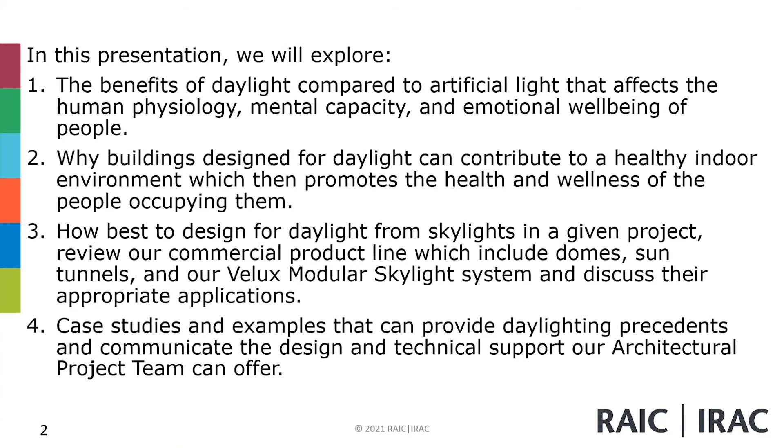And at the end of the session, participants will be able to identify the unique qualities and benefits of daylight versus artificial light as it relates to human health, development, and comfort, analyze the use of daylighting design strategies and principles using skylights, apply product knowledge to choose the appropriate skylight for their project, and recognize buildings using daylighting from above that emphasize the well-being of people that use the space.

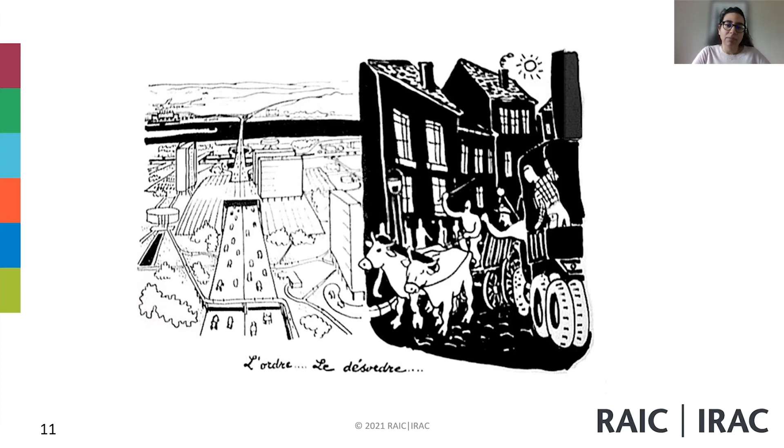It is certain that our bodies and minds need the sun. Humankind has always had an innate connection to the sun and has relied on its resources for health and flourishing. And the sun is the central entity for sustenance on a biological and emotional level. Light from the sun is fundamentally unique and has the highest light and spectral variations needed to support biological functions.

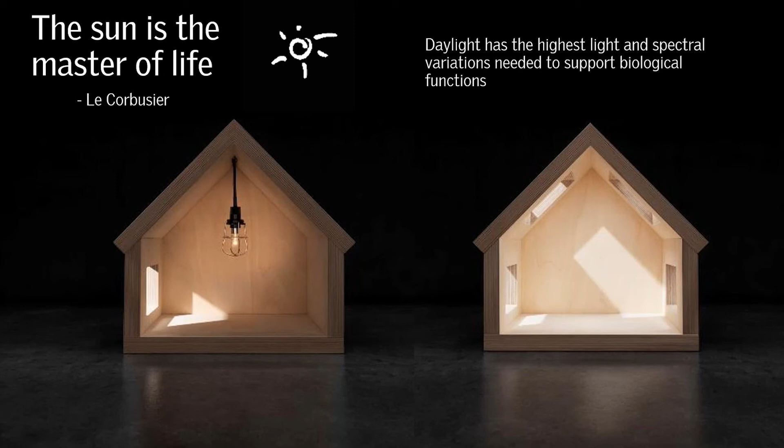Without the sun, we simply could not be sustained. And without daylight, we cannot flourish. In fact, a lack of daylight can have extremely negative effects on us. We can experience less energy, mental capacity, seasonal depression, and even increased risk of infection and disease. We need exposure to daylight for visual comfort and health. And our eyes do more than just see light. Our bodies respond to the different aspects of the light spectrum, not just visible light.

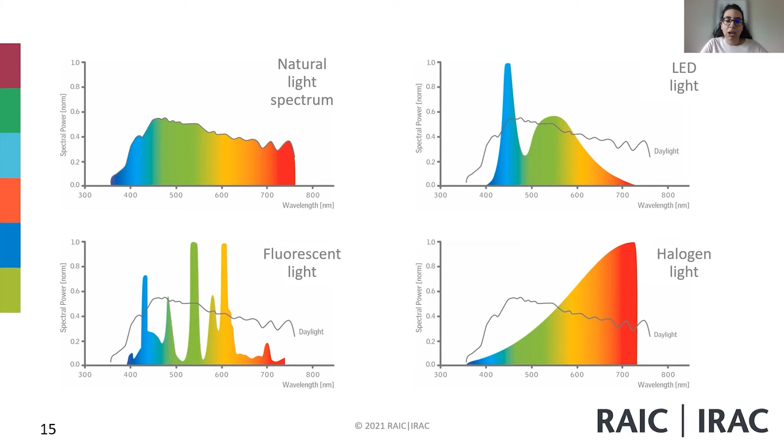As I said before, we need the sun for more than just seeing. The sun's radiation affects our bodies, minds, emotional health, and behavior. The sun's nutrients influence countless factors of human physiology and behavior, which are governed by the circadian rhythm, which is our 24-hour biological clock.

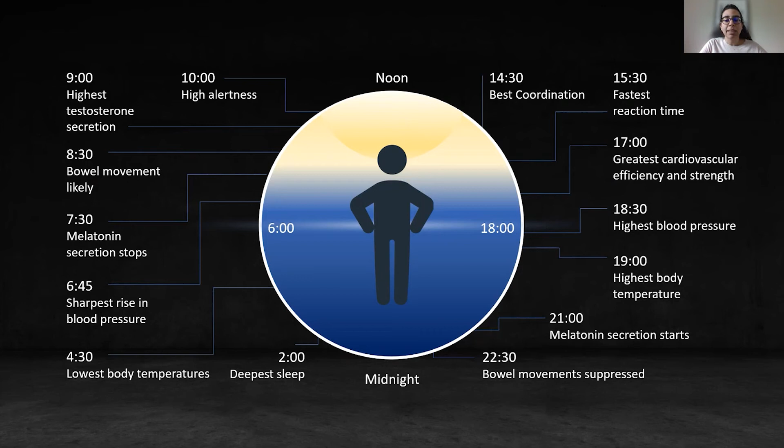So we are genetically bound to the natural rhythms of daylight to guide the body in cellular growth and the secretion of hormones. These variations stimulate the body's biological master clock on a cellular level, which includes the promotion of the processing of proteins. There's also non-visual input of daylight that is needed to synthesize vitamin D into calcium. It also regulates melatonin, which is related to sleep, and cortisol, which is related to stress. And ultimately, daylight ensures that our bodies are well maintained and balanced from day to day.

Circadian rhythms are kept in sync by various cues, including daylight levels throughout the day, which the body responds to in a way facilitated by a group of photosensitive cells found in the retina. And these are the eye's non-image forming photoreceptors. Lights of high frequency and intensity promote alertness, while the lack of this stimulus signals the body to reduce energy and prepare for rest.

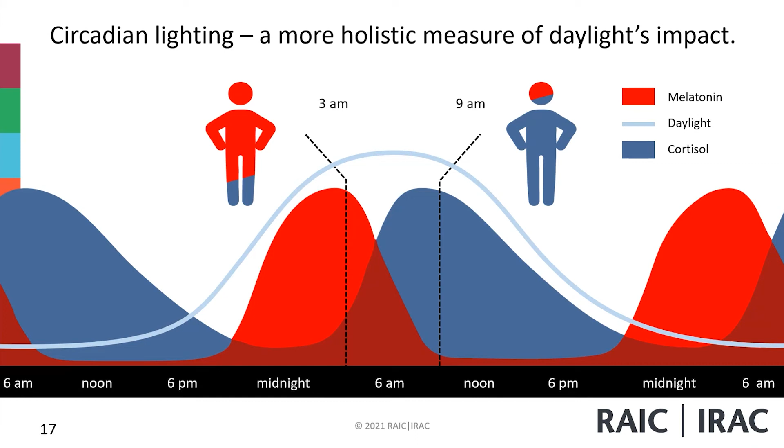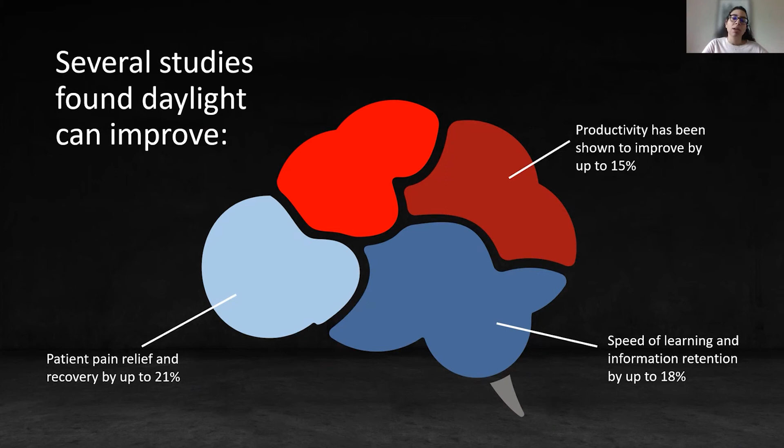We also see that several studies have found daylight to improve many elements of people's experience in the world. This includes how quickly children learn and retain information, shown up to 18%. 46% more daylight can help patients with pain relief and recovery by up to 21%. And even productivity has been shown to improve by up to 15% with greater exposure to daylight.

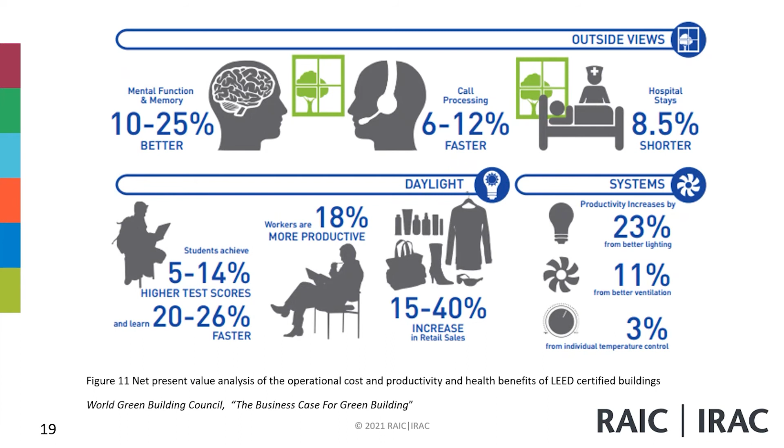There's also this element of view and surroundings. Sometimes it really is about what our eyes are seeing too. Looking outside changes the inside. When you open the interior to the sky and the surrounding landscape, the perception of the room is altered entirely. Suddenly it becomes a doorway to the outside, a place with plenty of daylight, space, and a connection to nature.

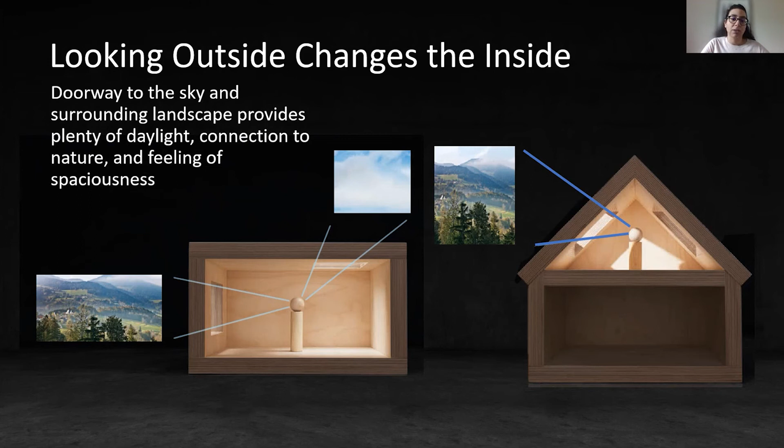And this draws back to the idea of biophilic design and how that can come into play in our emotional well-being and comfort, as well as thermal and visual comfort, which are also important elements to consider. You can have exterior views that absolutely transform the essence and expression of the interior of your space. This doorway to the sky provides views to outside, both the surrounding landscape and the sky. And both are really important for psychological and visual comfort.

It's also able to make the space feel bigger and brighter. You can experience less eye fatigue when the light is more balanced and coming from multiple sources. And overall, we naturally enjoy these kinds of spaces more. So how do you design for this?

Well, daylight is most powerful from above. Roof windows and skylights have shown to provide up to 2 to 3 times more daylight than facade windows. And a good rule of thumb we like to use is the more sky you see, the more daylight you get. And we have to remember that the sun is an extremely dynamic light source, and there's diversity of daylight. So you have multiple light sources.

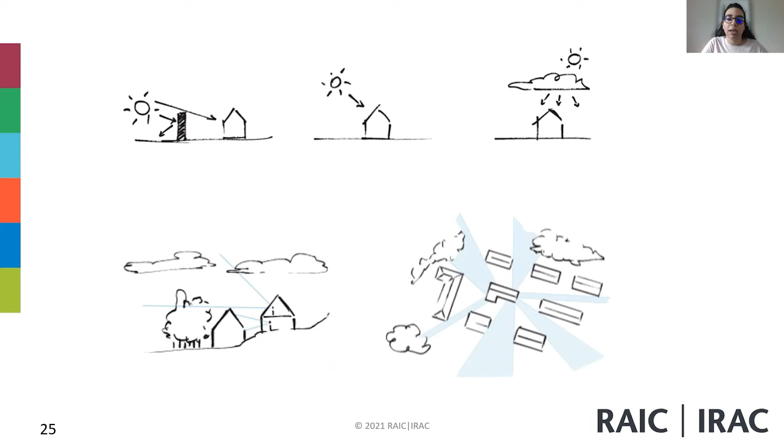And there are many factors that can affect daylighting in a building. You have your sky conditions, location, surroundings of the site. There's obstruction, orientation, the building's shape and size, interior materials, and reflectivity. There's a long list of factors. And the question is, how are you going to design your spaces to overcome these challenges in light of understanding the importance of daylight for people? And considering the placement of skylights can bring much daylight in spite of these challenges.

It's also important to understand the relationship of certain activities and how much light is recommended. This is really useful when designing for occupant comfort. So having the right amount of light is really important to reduce eye strain, and having comfortable light that is sufficient for the task and also easy on the eyes.

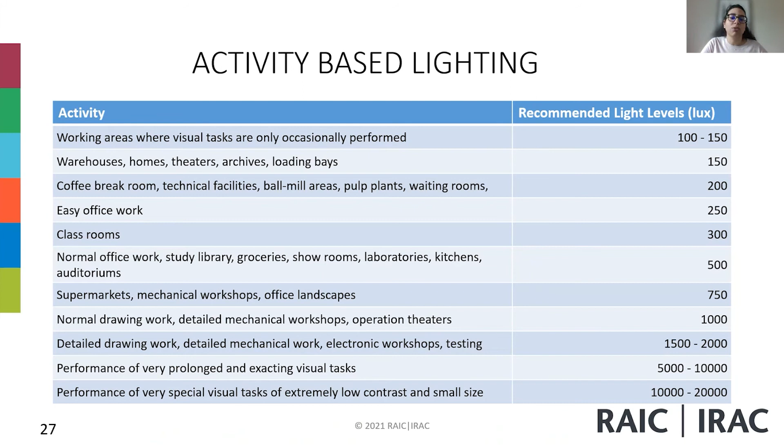And some examples from this table can include easy office work, which needs about 250 lux, classrooms, which need about 300, normal office work and libraries needing about 500, and more detail-oriented work is going to need even more light. So this is a really useful chart to have for targets for daylighting.

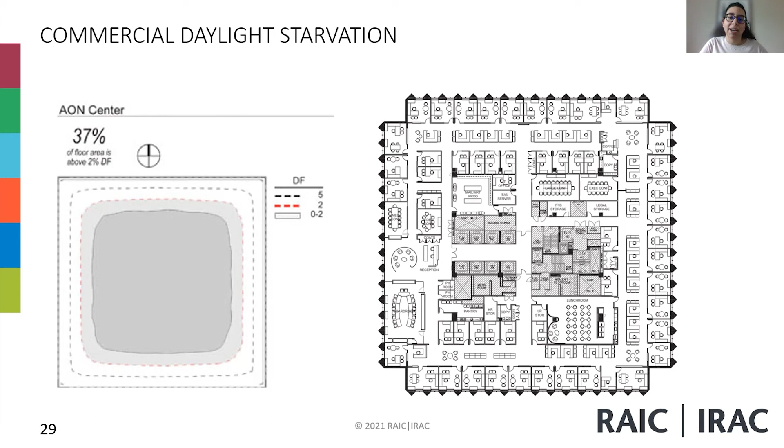In many locations on this floor plan, people will have to turn on their artificial light to do the tasks that they need to do. And drawing on personal experience, and I'm sure with many other people that have worked in an office, it is very difficult sometimes to have access or adequate access to daylight.

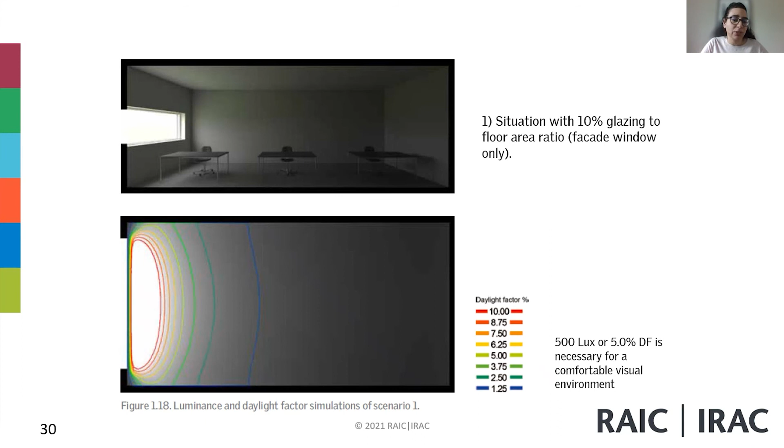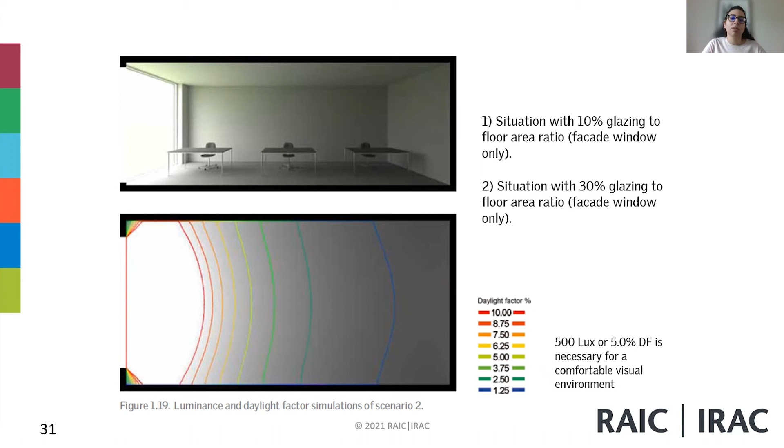A common solution that a lot of architects like to go towards is floor to ceiling glazing. And that will bring a lot more light, but the desk closest to the facade will experience a lot of uncomfortable glare, while the other desks in the room are still not receiving adequate daylighting. More than half of the room would still need to turn on their artificial lights to read and write.

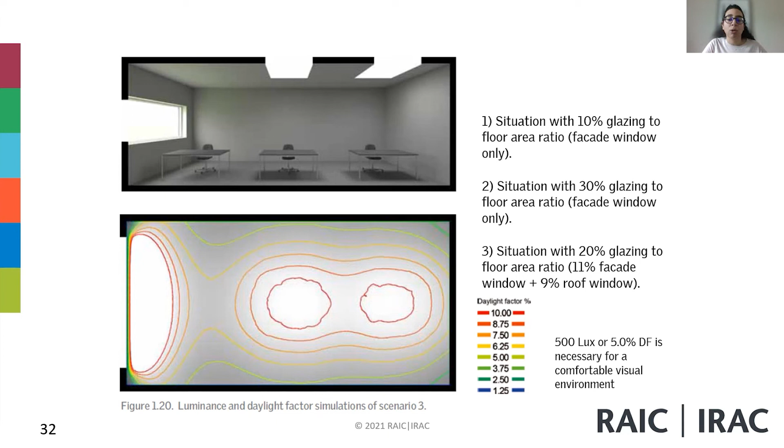Then we go to the third scenario, and this is showing the reduced facade window back to its original treatment, and then adding 2 skylights, which brings us up to 20% glazing to floor area ratio. The daylight here is well balanced with little glare and is distributed a lot more evenly throughout the entirety of the space, while reducing your overall glazing area. So the point is that with skylights, you can get more light and more comfortable light when daylighting from above.

Also consider using circulation spaces and stairwells. It is a great way to bring light down multiple levels of your building. It's also really effective in bringing daylight to those deeper and more central areas of the building that are farther away from vertical windows and may be starved for daylight. So think of designing these circulation spaces to be more open, which can also create opportunities to share and borrow daylight with other interior spaces.

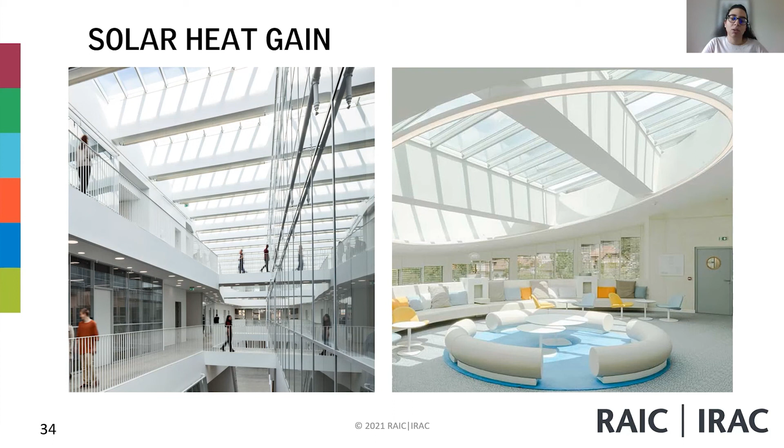And as much as we want more daylight in our buildings, we often don't want the added heat that comes from them. And we call this solar heat gain. Solar heat gain is the fraction of incident solar radiation that passes through the window. And solar heat gain is a major concern for all high performance buildings, even those with modest glazing. So this is a really important consideration when selecting a skylight.

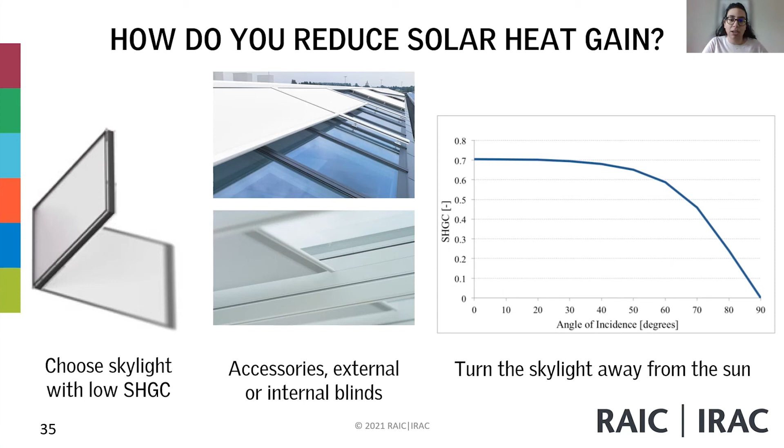You can reduce solar heat gain, and this is a similar approach to how you would consider glare control. Choosing a skylight with a lower solar heat gain coefficient can be really useful. Also using internal or external blinds. And since solar heat gain is a factor of area, you can also reduce the size of your skylight area. Another consideration is turning the skylight away from the sun and thinking of how sun path diagrams and orientation can play in this.

It's important to note that the sky also becomes a secondary source of daylight, as it is reflected daylight from the particles in the sky and clouds. And you can still receive a lot of daylight from the north. And north-facing skylights can provide a nice, even, diffused light with reduced glare and reduced solar heat gain due to its limited direct sunlight.

The location of your skylights matters also and can make a difference in the experience of daylight in a space. Having your skylights against a wall allows the wall surface to reflect light inward. We see light when it hits the surface, and that's important to note because the wall will become immediately illuminated, and this can increase the perceived brightness in a space.

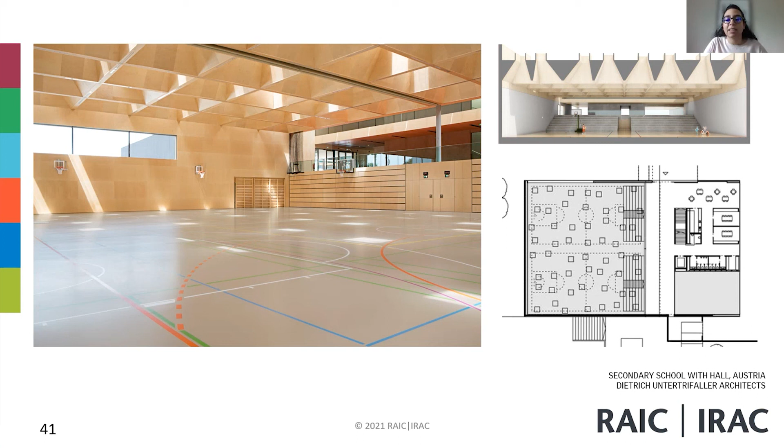You're also able to reduce your overall skylight area because of this. And the point is that you can bring more light in space by considering the design of your light shaft, especially flaring the surfaces of the light shaft.

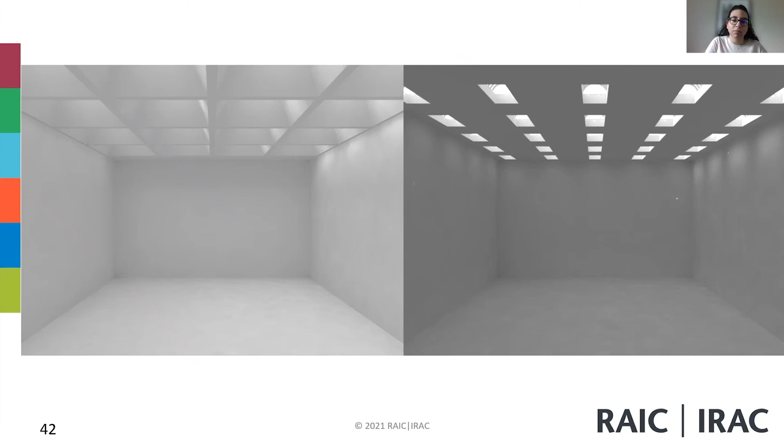Playing around with the repetition of elements and surfaces on your ceiling in relation to the skylight opening is also another way to bring in a lot of daylight in your space. By having this repetition of surfaces, you're able to have more light reflecting inwards off of more surfaces and more surface area. And using white to increase the reflection and the feeling of spaciousness, it's also going to provide more reflected and diffused and even light and less direct light.

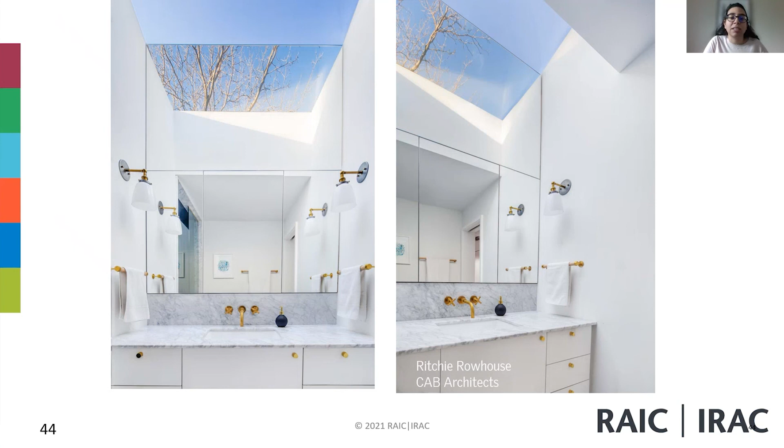And this also draws back on the idea that the more sky you see, the more daylight you get. So as you're reflecting more of the sky itself into the interior of the building, you're going to have more daylight in the space. So all in all, there are many creative ways to go about designing buildings with plenty of daylight. The emphasis is that daylight is an essential part of that.

And at Velux, we believe that both daylight and fresh air are key elements to designing healthy buildings. One consideration is the active house principle. The active house looks at three thresholds: comfort, energy, and environment. Some of the programs and standards you may be familiar with are built around energy, which can often miss the elements of comfort. An active house is built around comfort as the primary design driver.

Active house was born out of a need to prove that you can have a proper amount of natural light and fresh air and still build an energy efficient home. And ultimately, active house recognizes that human well-being is connected with a healthy indoor climate and key elements of daylight and fresh air.

So how can you select the best skylight? It's important to understand that designing with daylight is a thoughtful balance of considering the quantity and the quality of daylight. And it's equally important to know what kind of light will be provided by different product selection.

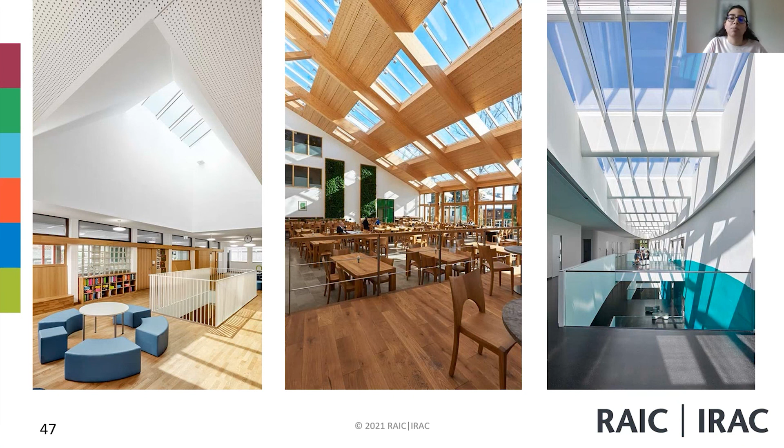There's such diversity in the types of projects that are designed, from residential to commercial, institutional, industrial, community buildings, the list goes on. And different buildings will have different roof types and ceilings. There is also diversity in the types of spaces and activities that are taking place in these spaces. And with that comes diversity in the needs of daylight in terms of quantity and quality. And with that comes diversity in product selection. So it's important to know what skylight is best suited for the daylighting needs of your project.

Sometimes an important element to your space is having a view to the outside and to the sky. You may also want a view to the outside in spaces where you are spending most of your time. And most of our product line offers glass, acrylic, or clear polycarbonate. These are also the product options that are going to allow for direct daylight. So the Velux modular skylight, or VMS for short, traditional commercial domes, circular domes, SkyMax, roof windows, and unit skylights will all provide a view to the outside and to the sky, as well as direct daylight.

Dynamic domes and sun tunnels, however, will not allow for a view. Dynamic domes have an inner white prismatic layer, and sun tunnels have different kinds of diffusers, and both of these will allow for diffused light and will not offer a view to the outside.

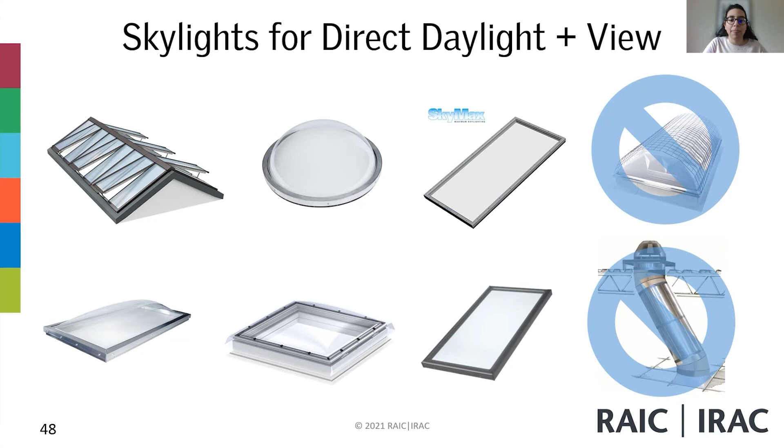Understanding what products offer glare control and what spaces will require it is also important. Spaces where you are spending lots of time working, reading, writing. This may include classrooms, libraries, office spaces, museums and galleries too. There is a concern of deterioration due to exposure to the sun, and they may want to avoid direct light.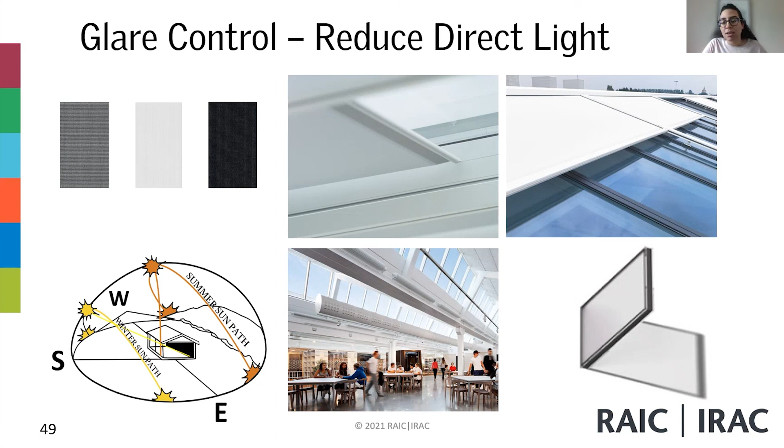In these kinds of spaces, you want adequate daylight, but also comfortable light. You don't want a lot of glare or hot spots. Intense light that will increase eye fatigue is what you're trying to avoid. Even light, not a lot of direct light, and diffuse light would be preferred for occupant comfort in some of these kinds of spaces. So there's considerations which include blinds, the orientation of your skylights, and glazing types and coatings.

With the VMS system and unit skylights, there can be blinds. Different colors will have different light transmittance. So black would act as a blackout blind. White could act more as a light filtering blind. You can also have blinds on the interior, which is most common in Canada. And also having them on the exterior is a possibility. And this will also help to mitigate solar heat gain as well as reduce your cooling loads.

Different coatings on the glass reduce your solar heat gain and visual transmittance. This plays a role also in the energy considerations. So that's another important element. And thinking of the orientation, having skylights facing the north allows for more indirect and diffuse light as opposed to direct light.

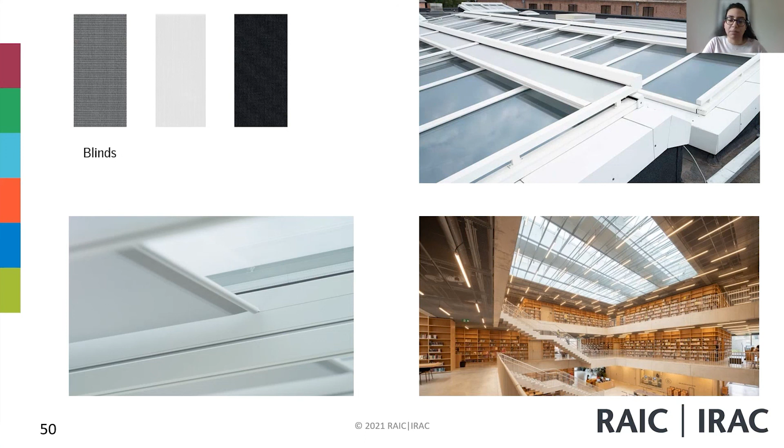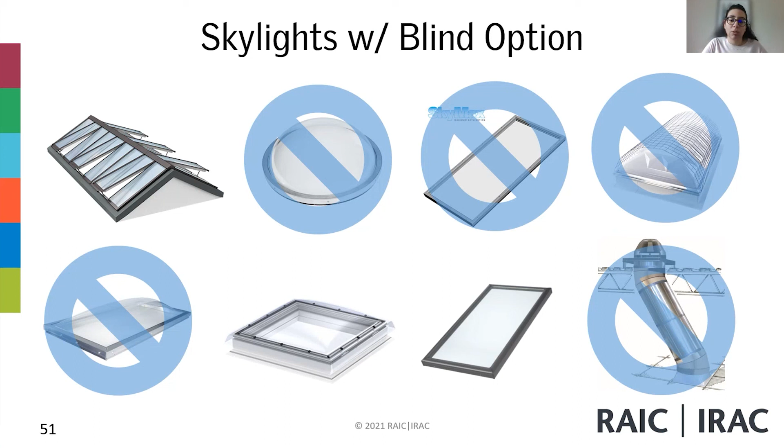And not all of our product selection has the option of blinds. We can do blinds for VMS, for the flat roof skylights, and residential skylights and roof windows. VMS can also do external blinds from a third party. Dynamic domes and sun tunnels do not have blinds. However, the diffusing material that is offered will diffuse the light, so you won't have direct light. And quick note for sun tunnels, though there are not blinds, there is an electric dimmer. Wasco, circular domes, and SkyMax also do not have blinds as an option.

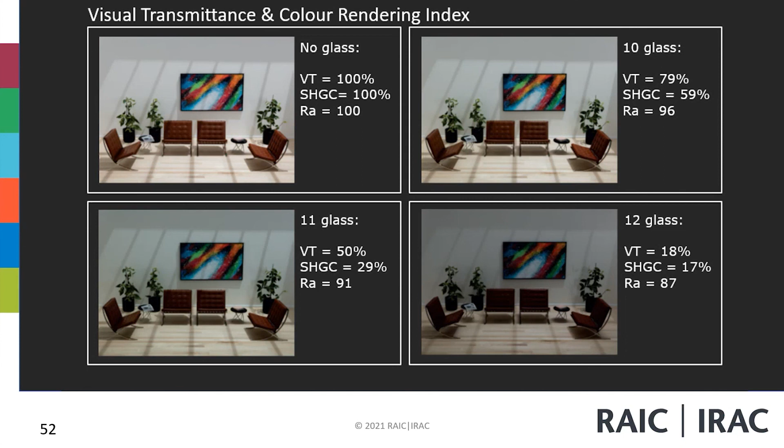Another way to control glare and reduce the intensity of direct light is through different glazing options. We offer different glass upgrades with varying levels of sun protection coatings, which are meant to mitigate solar heat gain. They can dramatically decrease your visual transmittance and will affect your color rendering index, which is the color of the light through the window. This doesn't just affect the light coming in, it also affects the view out through the skylight. So there is some kind of a trade-off when you are looking to have lower solar heat gain. It's also going to affect your visual transmittance and your color rendering index.

Since solar heat gain can be such a concern, especially in high performance buildings, it's important to know the ratings for different product selection. Residential curb mount and deck mount skylights, as well as VMS, will offer the lowest solar heat gain coefficients. So that's important. It's important to know the different ratings for these products.

Orientation is an important factor, as mentioned. Facing the skylights north and having a steeper pitch reduces your solar heat gain, as it rarely receives direct light. The north will receive diffused and even light throughout the day with very little glare. The VMS system has a configuration called the north light, which is integrated into the slope of the roof and can be pitched between 25 degrees to 90 degrees.

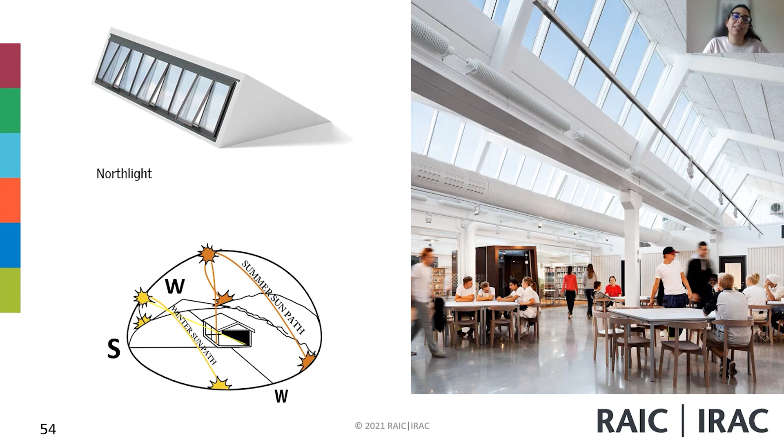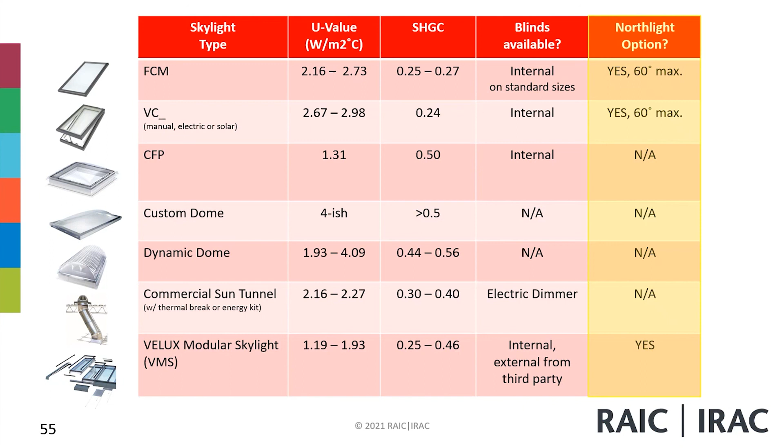So it's important to know what skylight products are able to be sloped on your roof at a steeper angle. Residential curb mounts can be sloped up to 60 degrees. Not noted here is deck mount skylights, which can be pitched up to 85 degrees. And the VMS Northlight configuration, which we just saw in the previous slide, can be sloped up to 90 degrees.

Another way to control glare and direct sunlight is considering products that can diffuse the light based on the design and the material. Most skylights that come to mind are often clear glass or plastic that will allow for direct daylight. But there will be projects where having an even distribution of light as well as the diffusion of light with no hotspots or glare is more appropriate. Certain spaces that conduct specific kinds of tasks may suggest diffused light over direct light.

So I mentioned these options previously. Sun tunnels and dynamic domes are great options for providing diffused light. Sun tunnels are useful when you have a greater distance between your roof deck and your ceiling. It has an extremely reflective tubing interior to reflect daylight farther down into your space, with 3 different diffusing lenses for hard ceiling, suspended ceiling, or open ceiling.

Dynamic domes have the octahedron shape that's going to allow for a broader spread of light in the space. It also has the white prismatic interior layer, as I mentioned previously, which will diffuse the light 100% inside, so you will get 0 glare and 0 hotspots in the space.

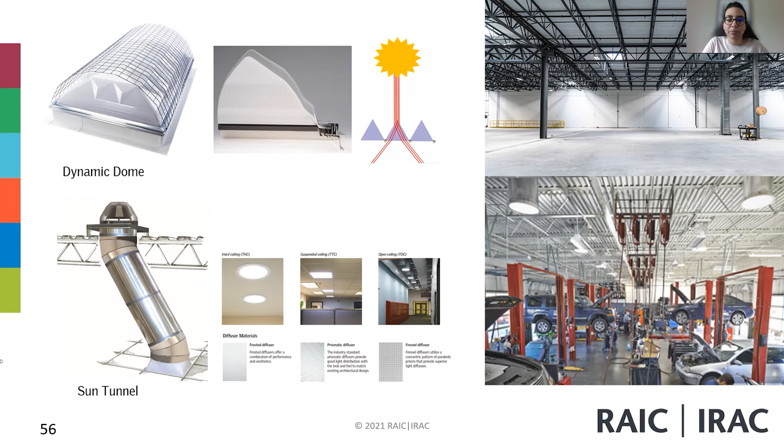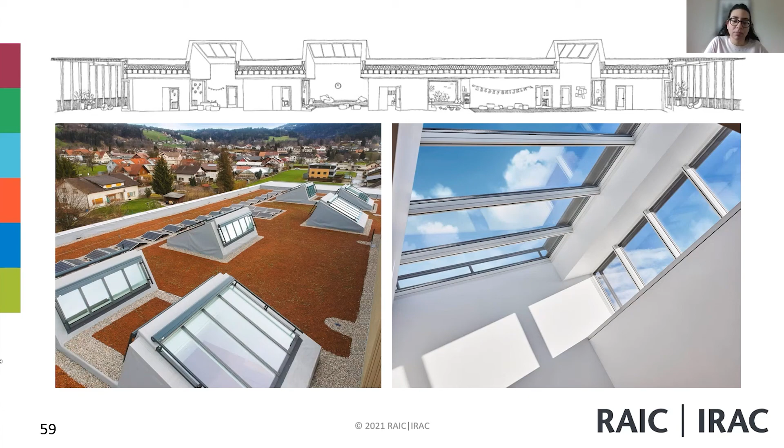There are also more general studies that show connections between daylight levels and the improvements in children's learning and test scores. There have been noted higher scores of up to 25% in math and reading. Working in classrooms without daylight can really upset basic hormone patterns. So with daylight, we find there's fewer sick and absent days from school compared to those with inadequately daylit classrooms. There's better concentration and improved vision, and there's also better memory retention. So we see the necessity of daylight in spaces, and we see that very practically in a school and how they were able to design for daylight in this building.

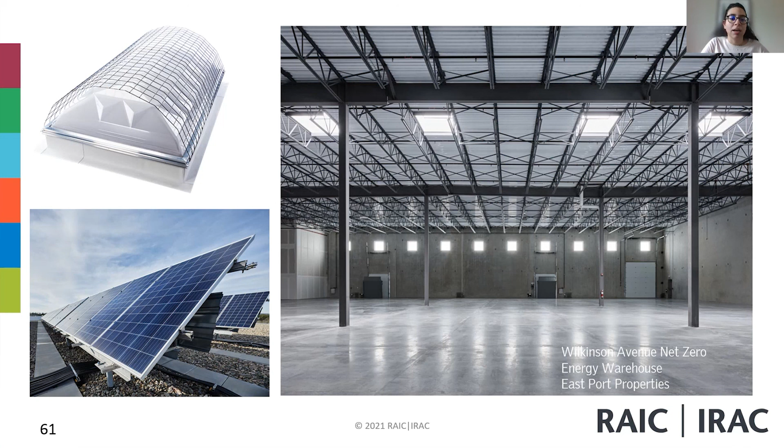So after investing considerable research to leverage daylight and fresh air as key drivers of improved occupant quality of life, this building was introduced as a new paradigm for healthy, holistic architectural design. Each department had its own needs in regards to daylight, acoustic privacy, and electrical requirements for certain equipment. So a really well-formed design was required and needed detailed studies on energy use, airflow, and task-appropriate daylight factors.

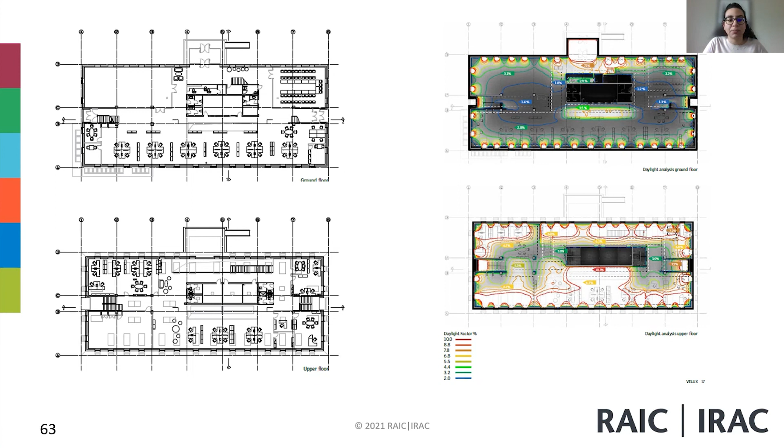The design of this new headquarters followed the Active House standard and principles, especially when it came to daylight and views to the outdoors. And this was all done in hopes to usher in a new era of office buildings that are thoughtfully designed to promote productivity, motivation, and pride, and especially health and well-being for the body and mind, all while in the midst of a really busy and competitive work environment.

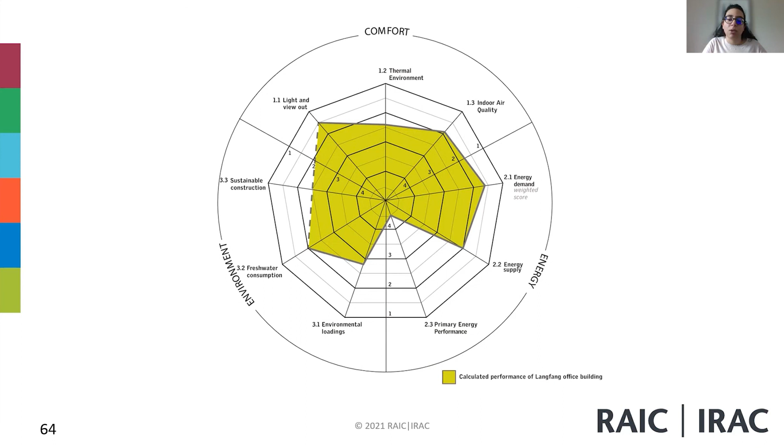In addition to thermal comfort and low energy applications, the design strategies included natural full spectrum daylight and clean fresh air. And occupants have shown to be much more satisfied and happy with their workplace environment, which contributes powerfully to their overall health and well-being.

This concludes the presentation. I wanted to quickly reiterate the main takeaways for today's topic. To identify the unique qualities and benefits of daylight versus artificial light as it relates to human health, development, and comfort. Analyze the use of daylighting design strategies and principles using skylights. Apply product knowledge to choose the appropriate skylight for the project. And recognize buildings using daylighting from above that emphasize the well-being of people that use the space.